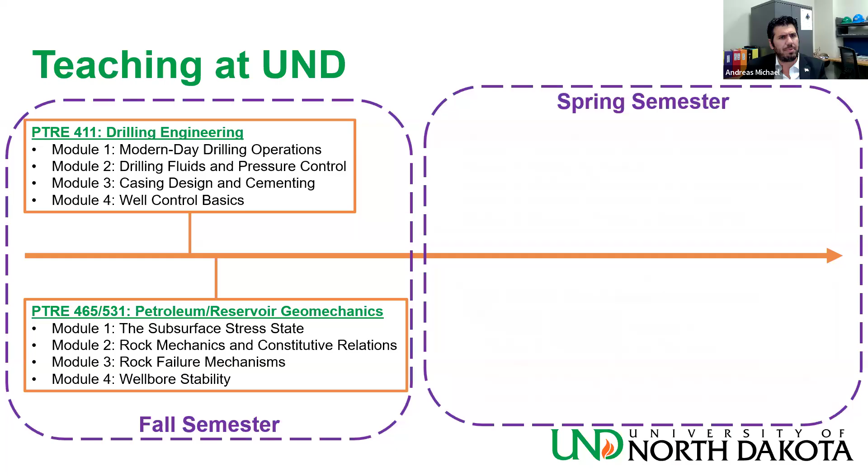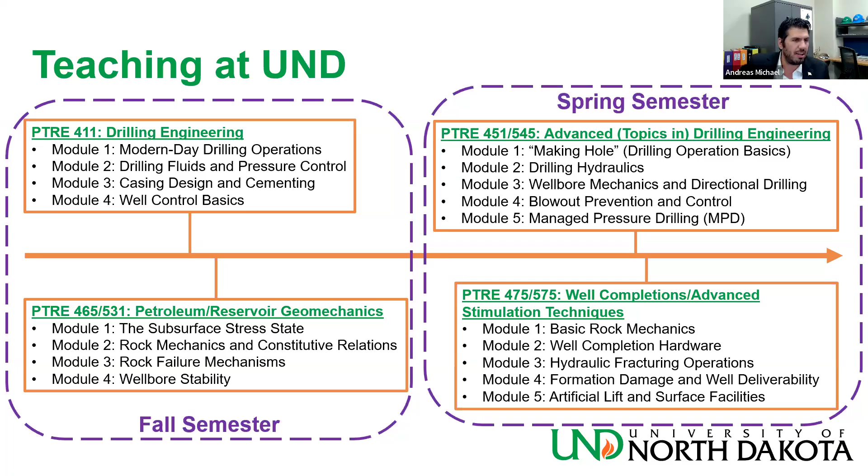Before I dive into the technical stuff, a little bit of what I do here at UND. I have been in this position since 2023. In the fall semesters, I teach two classes, drilling engineering and geomechanics. It was in one of those geomechanics lectures last fall when I came up with this idea. Richard Schultz is teaching that class this semester. In the spring, I generally teach advanced drilling engineering and well completions, which is coupled with advanced stimulation techniques, a purely graduate course. Undergraduates go through this stream of classes, taking drilling in the fall semester of their junior year, advanced drilling in the spring semester, and then geomechanics in the fall semester of their senior year, finishing with well completions. So each class is a prerequisite of the next one.

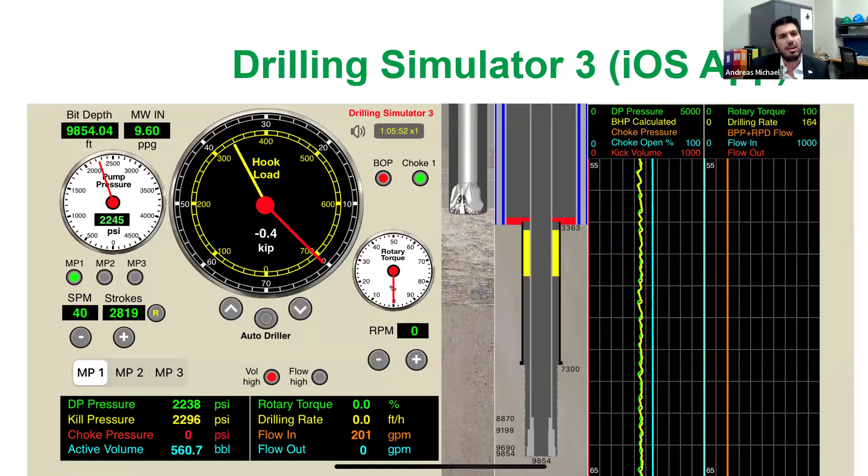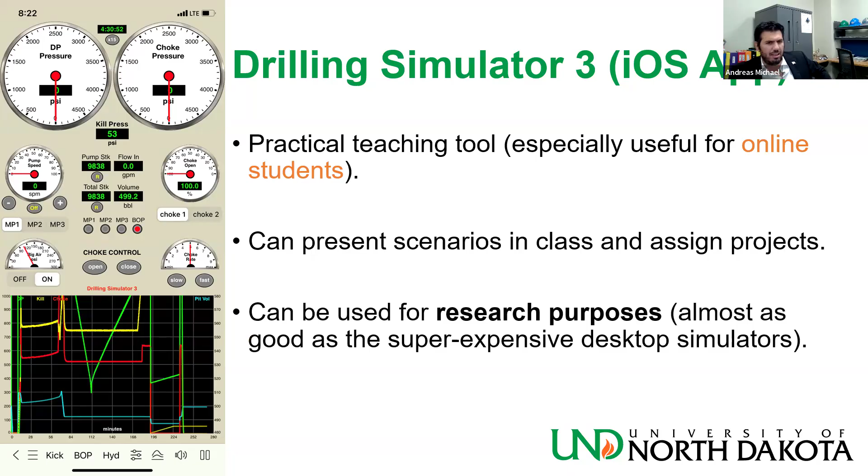Now, as you know, I'm teaching a lot of drilling courses, and UND has a very big portion of its student population that is online students. So I make a very big use of Drilling Simulator 3, which is an iPhone app actually. It's a very practical teaching tool, especially for online students. We use it to run class exercises and assign projects, and we can also use it for research purposes, although I have not yet engaged in that. It represents a proper utilization of digital transformation. You can find a lot of the exercises that I cover in class on YouTube with step-by-step guides.

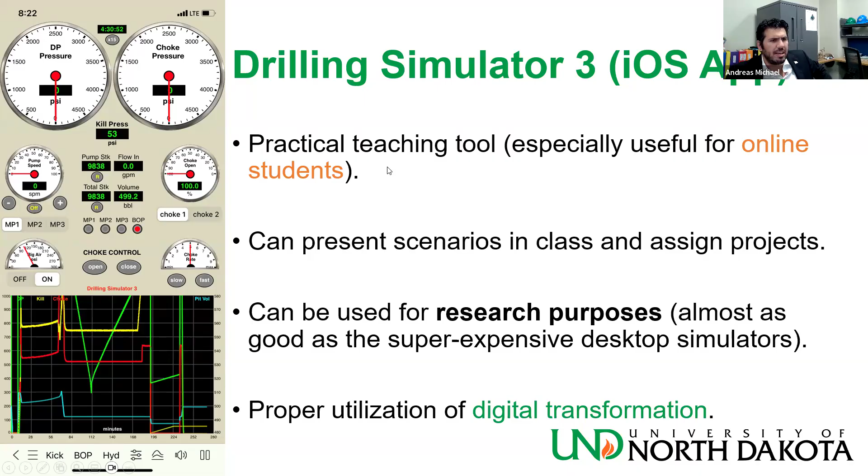I have a project on underground blowout prevention after offshore well capping. I have a project on experimental investigation on hydraulic fracture interference using laboratory scale testing on transparent gelatin blocks. I have a project on mechanistic modeling on wellbore integrity. We have a project on formation damage mitigation in enhanced oil recovery operations in carbonate formations. And we have a thermohydroporomechanical modeling project for hydraulic fracture initiation.

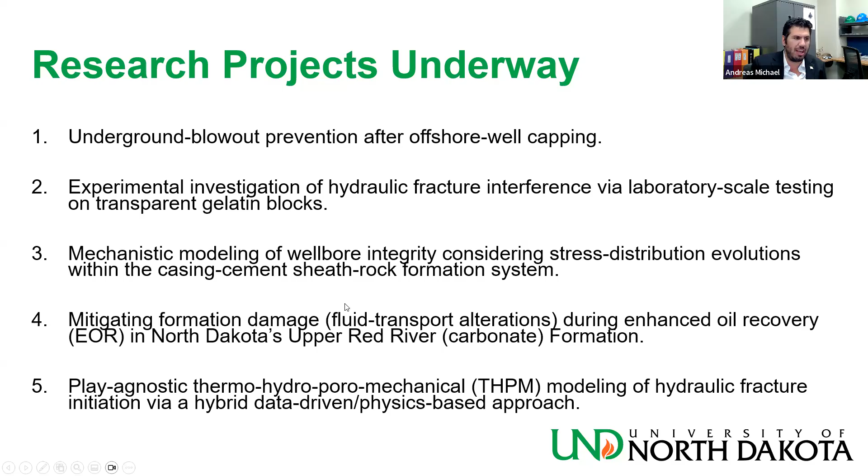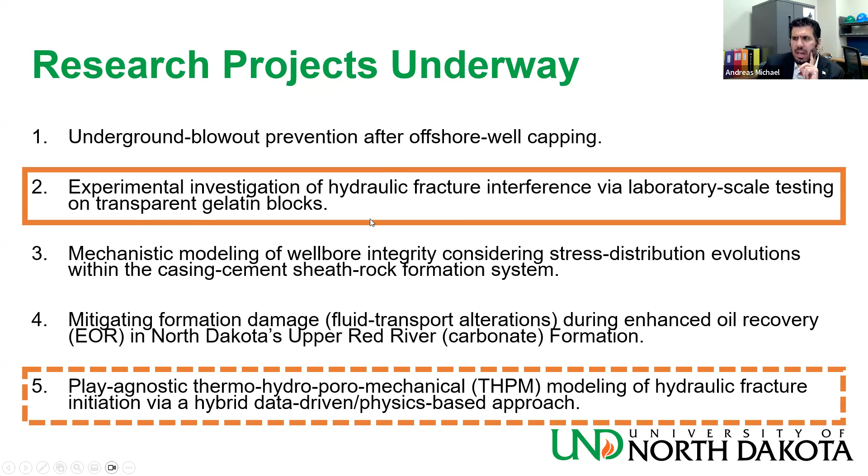What I will talk about today involves project number 2 and a little bit from project number 5. Project number 2 is the one run by the student who is a dual master's and PhD student, and it has been presented as a paper at the last ARMA symposium in Santa Fe. I did present it, and I was the first author on the paper. The second author was Chukwuemeka Kalu, and the third author was Abdelmalek Abbes. The goal is for this to be Chukwuemeka Kalu's master's project, so it's going to become eventually his master's thesis. He's going to take the lead on this project, and we plan on submitting a paper for peer review soon, somewhere in the Elsevier journals.

Now, a little bit of a historical overview in hydraulic fracturing. I always try to bring history into topics I'm discussing.

If we go back to the mid-1800s, people were torpedoing wells for stimulation purposes, and oil was discovered in the US in 1859. A few years later, this gentleman is actually the guy who assassinated Abraham Lincoln, John Wilkes Booth. He was an actor, but his job before that was to torpedo wells for stimulation purposes. He was running a company called Dramatic Oil because he liked acting, I guess. It was a common practice to torpedo wells in order to stimulate production.

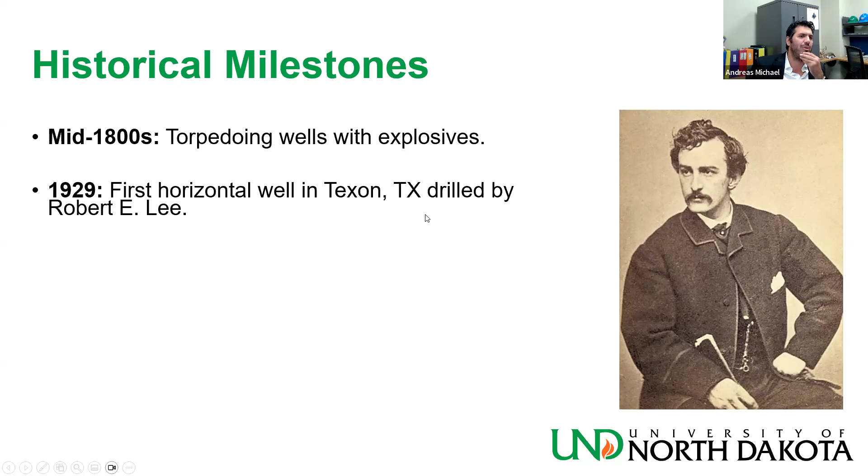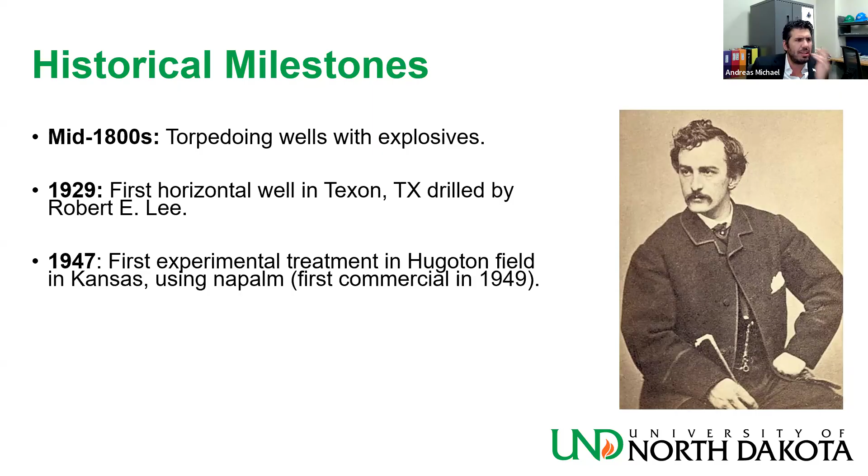And then in 1947, it's the first time fluid was used for stimulation purposes in Hugoton Field in Kansas. Napalm was used, and then two years after that, we had the first commercial treatment.

Now in 1982, George Mitchell drilled the first well in Barnett Shale in Texas. And I think it was 1997 when the first slick water fracture treatment was performed. It basically brought hydraulic fracturing technology to more or less where it stands today.

So when we do modern day hydraulic fracture treatments, our goal is we want something that looks more or less like you come in with a well, you drill a vertical section followed by a horizontal lateral. Now in real life, things will look a little bit more gentle, won't be like an abrupt kink. You have a kickoff point and then the landing point, but then you have the horizontal lateral through a shale section. And then you go from the toe of the lateral to the heel of the lateral, trying to pump as many fractures as you can.

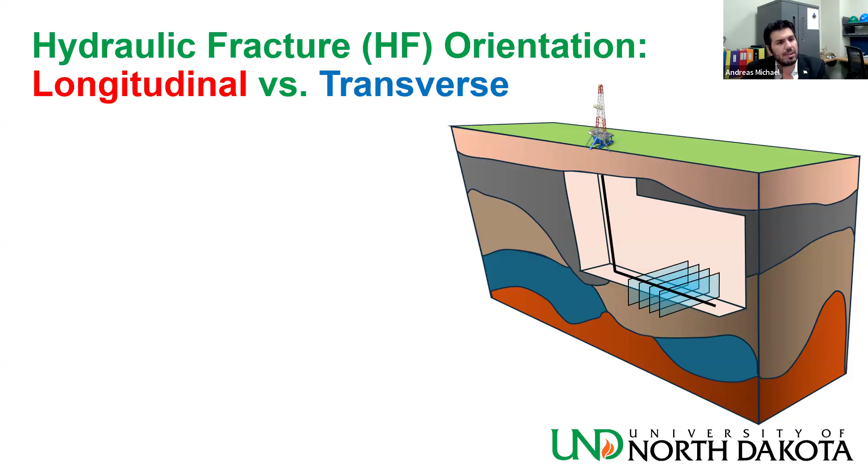And you want to stack them next to each other, and you want to get as many as you can next to each other. So the goal is what we call a transverse hydraulic fracture, which I have here colored with blue. It's a fracture that is orthogonally oriented to the wellbore. If you have a horizontal wellbore, as in this case, it would be also called a vertical fracture. But the name transverse has to do with the way it's aligned to the wellbore. Some call it lateral fractures, some call it orthogonal fractures, etc.

And sometimes you may not be able to get a transverse fracture like that. You might get something like the red fracture on the left, which is basically a longitudinal fracture. It's a fracture oriented axially with respect to the wellbore.

Now, the productivity of one longitudinal fracture is higher than that of one transverse fracture. However, if you stack many transverse fractures next to each other, they will outperform one gigantic longitudinal fracture, which would be what you will get if you get multiple longitudinal fractures growing next to each other. So one longitudinal fracture outperforms the transverse, but many transverse will outdo a gigantic longitudinal fracture. So the goal, what we are going after in modern day hydraulic fracture treatments, is the blue fracture on the right.

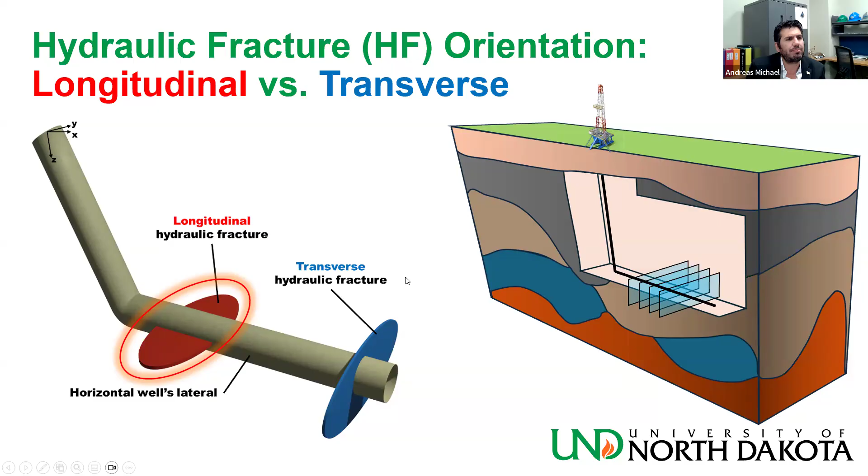Now, many times, I guess the general rule of thumb is that if you drill your horizontal lateral along the least compressive stress, you maximize your chances to get transverse fracture initiation. But this is not always the case, and that is because when you are drilling a well, you are removing rock and you are replacing it with fluid. That disturbs the stress field around it. And you also do other stuff like you run casing, you cement it in place, you have formation damage coming from different ways. So you have a lot of stress impediments in the near wellbore region that may prevent your fractures from initiating in this favorable direction.

I have here on the left a screenshot from Valko and Economides' book, Hydraulic Fracture Mechanics, from 1995. You see a well that was drilled in a favorable direction, but the initiation wasn't favorable. So you get longitudinal fracture initiation from that well. These longitudinal fractures won't go very far away from the well. They will either terminate prematurely or they will hit on a discontinuity like a pre-existing fault, and they will reorient to the favorable transverse orientation.

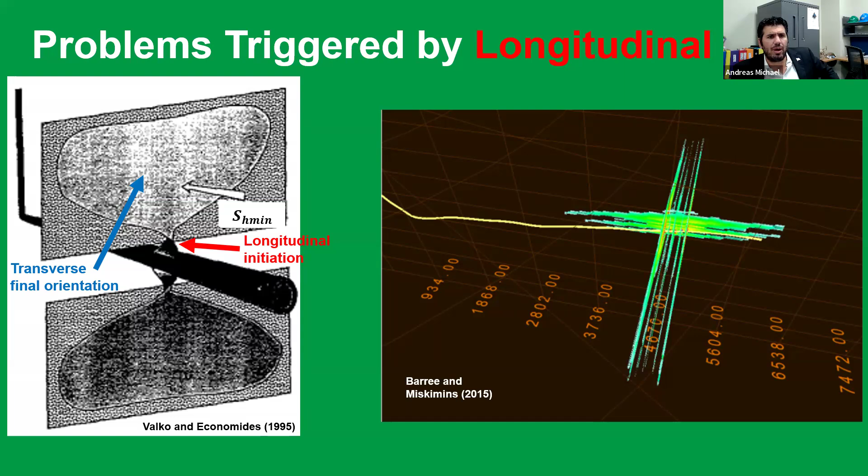Nevertheless, this twisting that takes place in the near wellbore region creates what we call near wellbore fracture tortuosity, and it affects operations quite greatly in an adverse fashion. You can get early screenouts or low stimulated well productivity, which affects your economics very badly. Now, on the picture on the right, you have a more real-world version of what happens in a larger scale, let's say, and that is from Barree and Miskimins 2015.

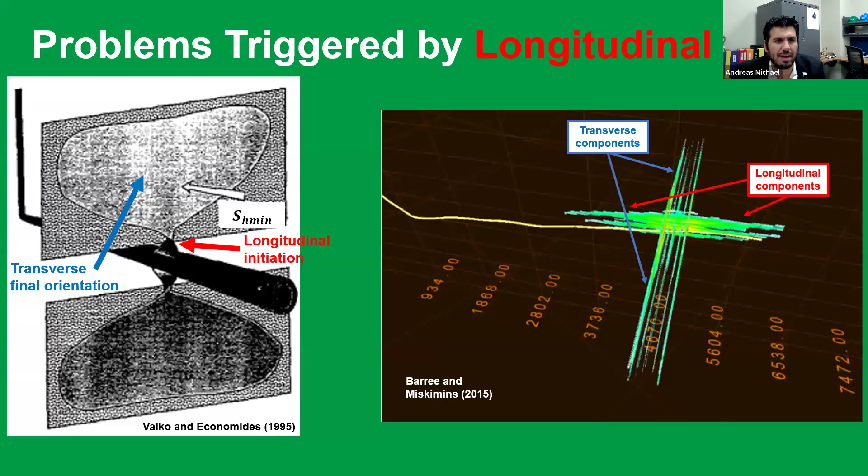You have longitudinal components mixing with transverse components, causing a lot of what we call near wellbore tortuosity, and we are trying to avoid this.

From the same paper, I have here a picture from a tracer test run during the treatment, a multi-stage treatment, where the fluid used to stimulate stage 1 is colored yellow, the fluid used to stimulate stage 2 is colored red, and the fluid used to stimulate stage 3 is colored blue. So if we do our job right, yellow fluid will stay in stage 1, red fluid will stay in stage 2, blue fluid will stay in stage 3.

But you see mixing, you see yellow fluid in stage 2 and 3, red fluid in stage 1 and 3, and blue fluid in stage 1 and 2. So you get stage communication, which was attributed mainly to those longitudinal fracture initiations in that paper. And it shows us that longitudinal fracture initiation is a reality many times, and it can adversely impact your stimulation treatment result. So we want to avoid that.

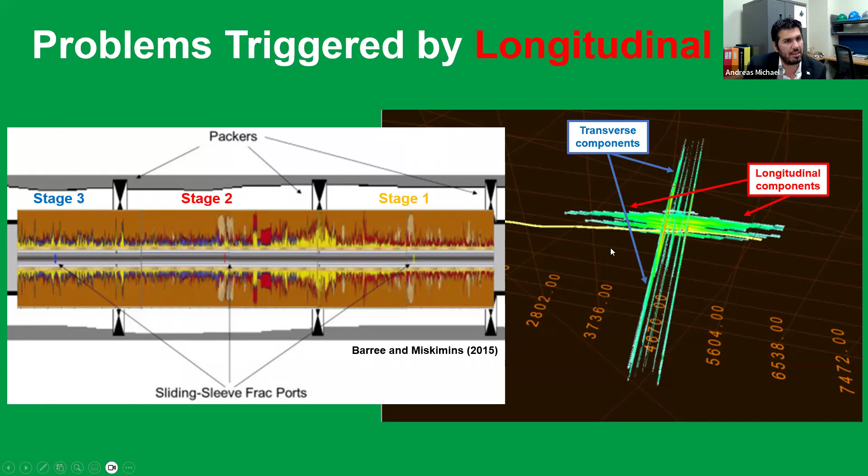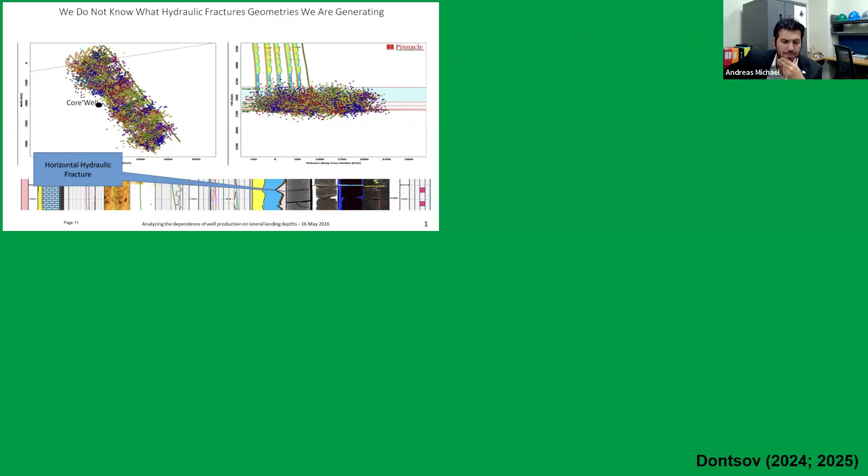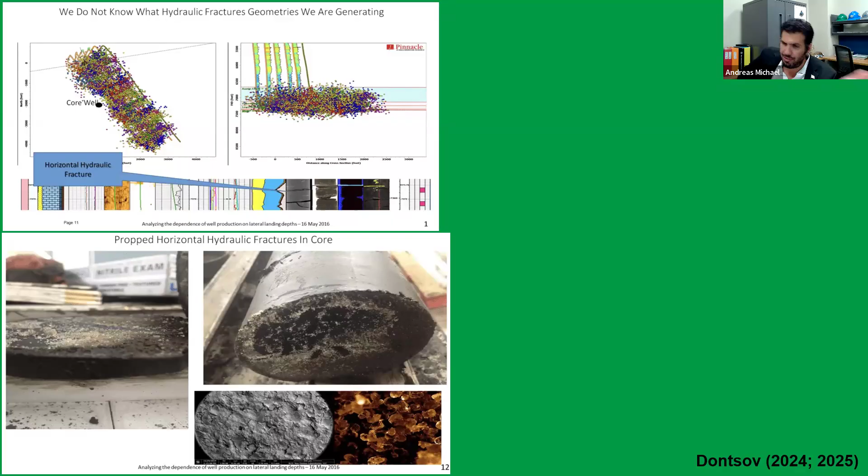Now, Egor Dontsov last year had a very, very interesting blog for ResFrac where he presented a lot of evidence in terms of microseismic data, core observation, casing deformation, tilt meter data, and even fiber optic measurements that basically provided evidence for horizontal fractures, which would be basically what we call longitudinal fractures from a horizontal well. And this year, he had another interesting blog where he discussed the computational modeling of those horizontal fractures, which is very, very important. So slowly but surely, these longitudinal fracture initiations become more and more important in our job.

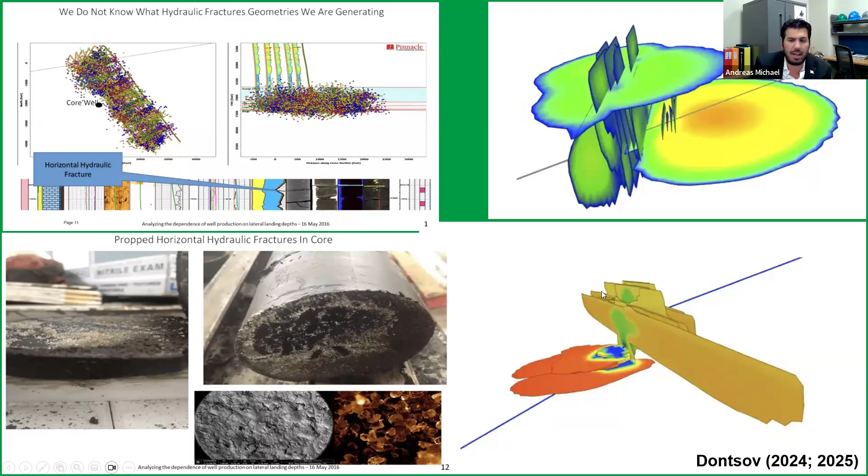And it's something, I guess, that is worth examining. And to examine fracture initiation, you have to look at the subsurface stress state, which is simplified greatly by the Andersonian faulting theory, where we have basically a vertical stress called SV and a horizontal stress SH max and SH min. SH max always bigger or equal to SH min.

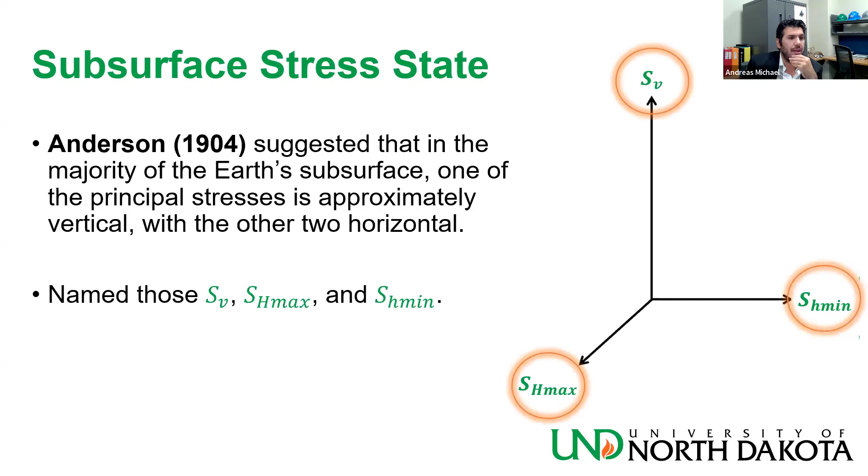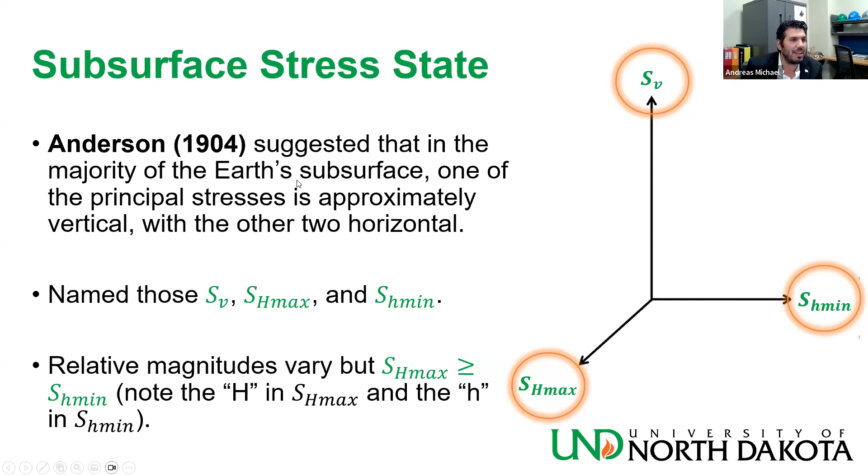Notice the uppercase H for SH max. So the two rules that we have to honor for Andersonian's theory is basically one of the stresses needs to be vertical, the other two need to be horizontal, and SH max cannot be smaller than SH min. Now, that gives an infinite number of different stress permutations for those three in situ principal stresses.

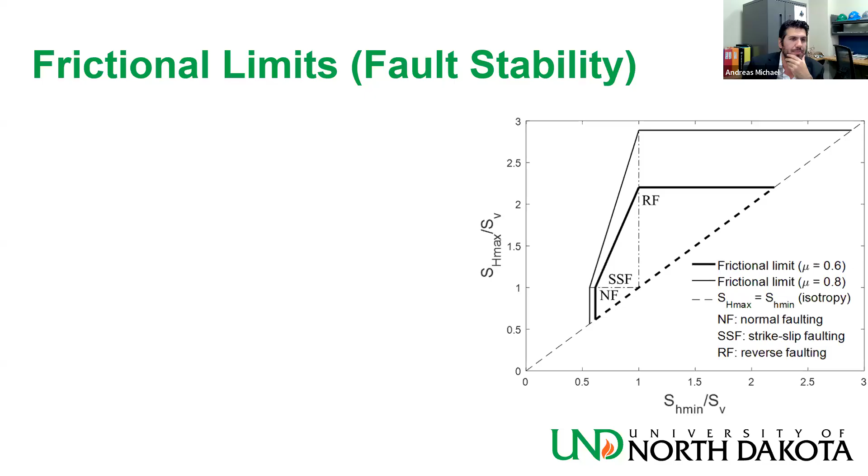We need to think which of those permutations will yield a stable environment. And for that, we need to consider fault stability. And we basically use a stress polygon to display this.

I know that it was Zoback sometime in the 70s, I think, or early 80s that came up with the concept of a stress polygon. The version I'm using in my work, in my publications, is one that was from Nelson in 2005, which is fully dimensionless. So we have SH max on the vertical axis and SH min on the horizontal axis, both normalized by SV. The dotted diagonal represents the line of horizontal isotropy where SH max is equal to SH min.

As we cannot have SH min bigger than SH max, anything below that diagonal is impossible to exist. And then with the solid lines, we have the friction limits. That is basically honoring Mohr-Coulomb's failure criterion for pre-existing faults who exhibit a friction factor of mu between 0.6 and 0.8. The solid lines are for 0.6 and the thinner solid lines are for 0.8.

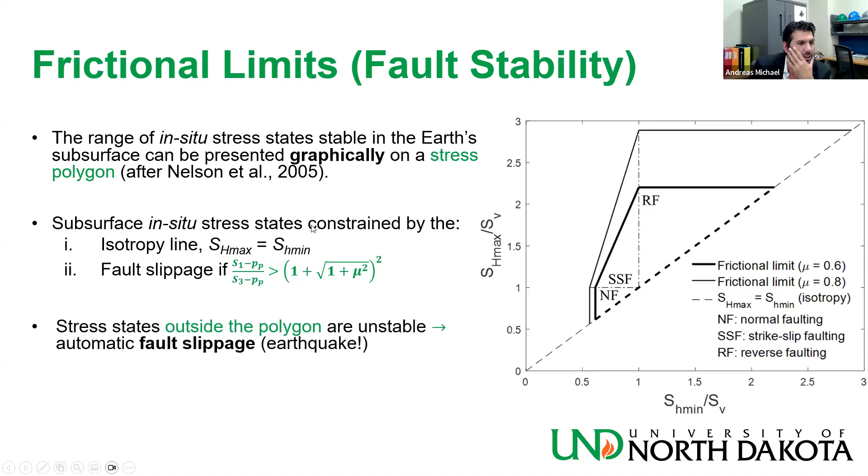Now, there is a lot of assumptions associated with this polygon. All the faults need to be critically stressed and favorably oriented. But that basically gives you a nice idea of what stress states are possible to exist in a stable fashion in the Earth's subsurface. And we have the three faulting stress regimes: normal, strike slip, and reverse. Reverse faulting has SH max bigger than SH min, which is bigger than SV.

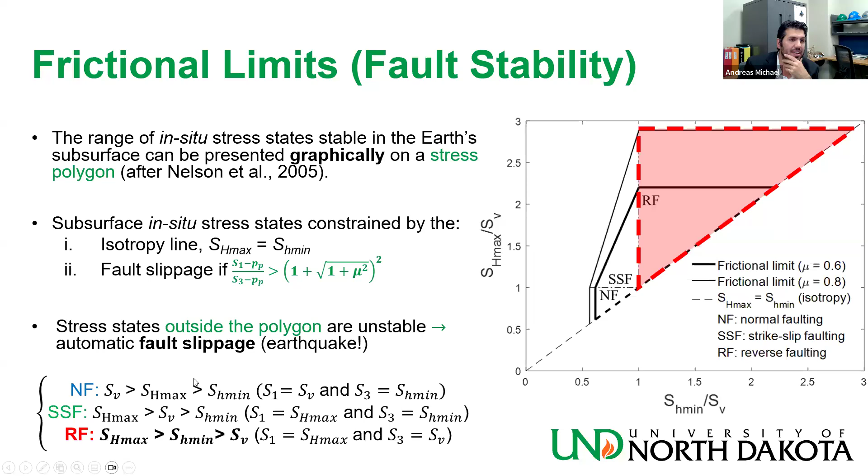And something that was counterintuitive when I was young and I was working on this stuff as a student was that even though normal faulting is the most common stress regime that you will encounter in the Earth's subsurface, the range of stable stress states that are possible to exist for reverse faulting massively outweighs those of strike slip and normal faulting. So that's an interesting finding.

Now, when it comes to tectonic confinement, the limits basically of SH max and SH min, Simpson tried to further simplify everything in 1997 by lumping the three values of the in-situ stress states into one dimensionless variable. He called that A phi, which basically varies from 0 to 3. 0 to 1 is for normal faulting, 1 to 2 is for strike slip faulting, and 2 to 3 is for reverse faulting.

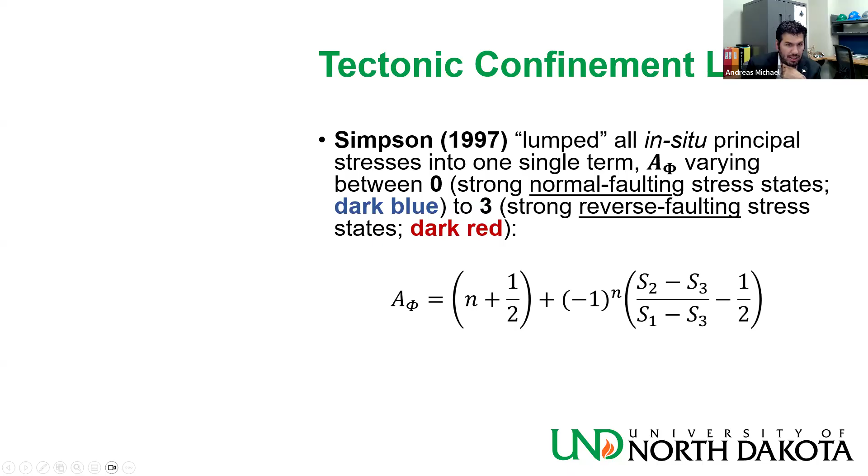Jens-Erik Lund Snee, he was in Stanford at the time.

He thought about applying a temperature color scale into those A phi ranges. Dark blue was assigned to very strong normal faulting, dark red was assigned to very strong reverse faulting, and everything else designated with intermediate coloring.

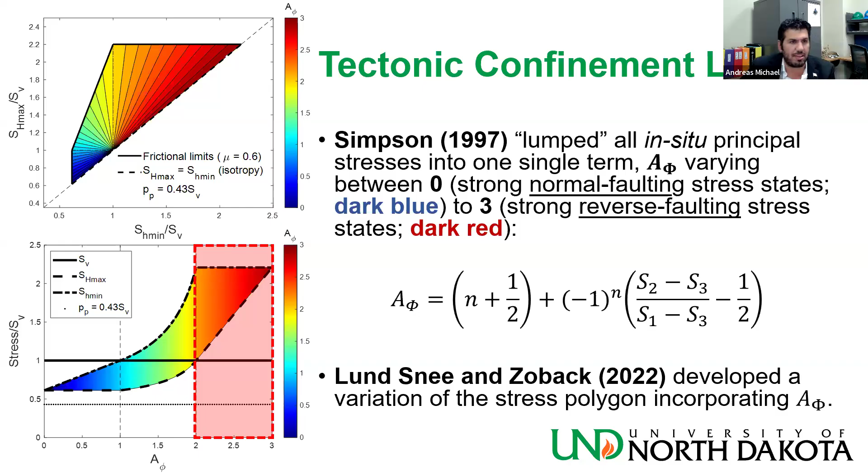In my geomechanics class, I make the students draw this diagram for one homework because I believe it has a lot of utility. If we're able to show failure on this plot in a graphic manner, it will become a very valuable tool, almost as strong as a stress polygon is today.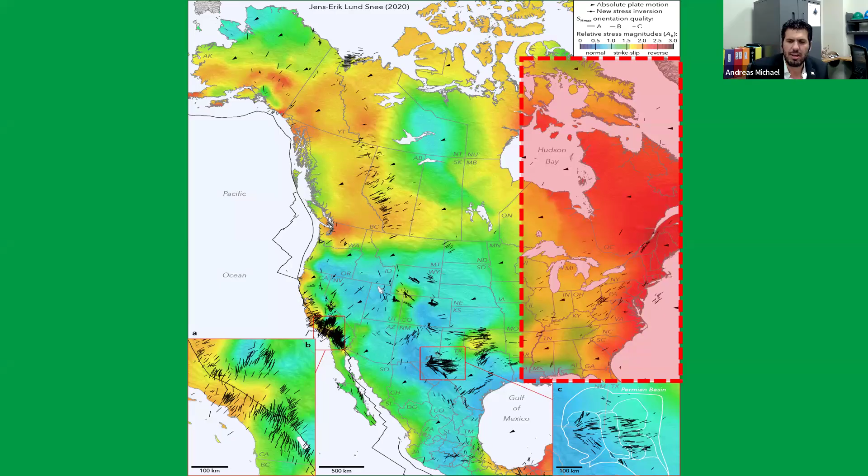Looking at the map of North America, we see a lot of reverse faulting stress environments on the East Coast, and also on the west side of Canada where the Montney Shale is, and there are parts in Mexico as well, in the south, etc.

But the application of what I'm discussing in this project extends beyond reverse faulting stress states. There are areas of Vaca Muerta that are strike-slip towards reverse faulting that have the same issue. Utica, Montney Shale has parts that are reverse faulting. The Cooper Basin in Australia, Gippsland Basin in Australia, and parts of the Sichuan Basin in China all have the same issue this project is trying to address.

So there's a lot of utility that goes beyond reverse faulting stress states.

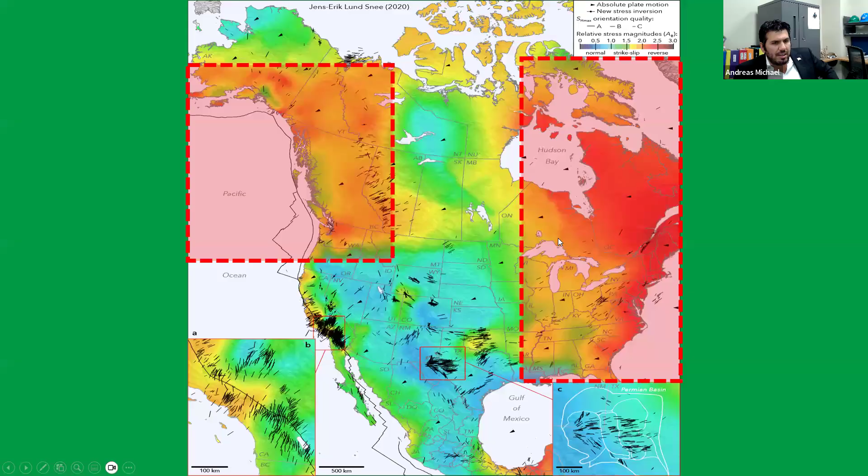If we were giving this presentation in the 1950s, it wouldn't be via Zoom, and the room would be divided between horizontals and verticals. There would be people advocating that all fractures are vertical, and others advocating that all fractures are horizontal, and they would both have strong supporting evidence on either side.

It was Hubbert and Willis in 1957 that ended the discussion by saying tensile fractures can be either horizontal or vertical. It depends on the stress state. Generally, or always, mode 1 tensile fractures often do work against the least compressive in situ stress.

For normal faulting and strike-slip faulting, this is easy. As I said earlier, you just aim your lateral to be parallel to Sh min, and then you maximize your chances for a favorable transverse fracture initiation. Sometimes this may not be the case, but it doesn't mean you have to drill your well any different. In fact, in Louisiana, it's state law to drill your well north to south — that's basically toward the Gulf, which is approximately the direction of Sh min in that area.

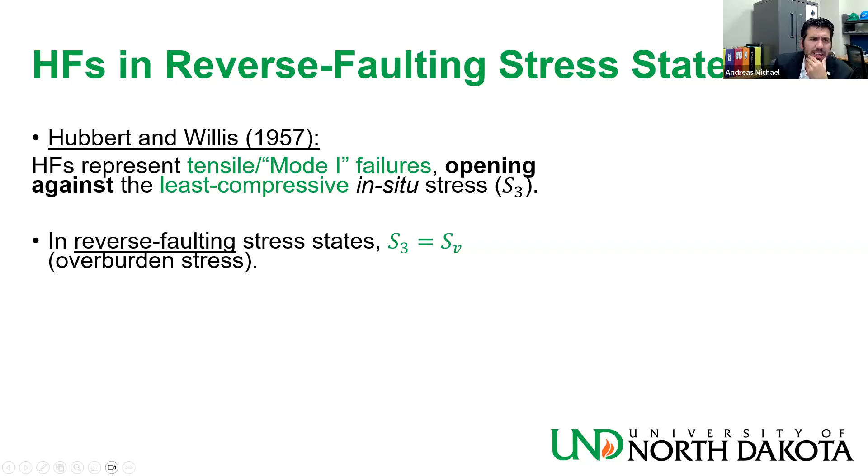But when you're dealing with a reverse faulting stress state, the least compressive stress is basically SV. That will promote longitudinal, pancake-like fractures, which we want to avoid because we don't want our stimulated well to be underproducing.

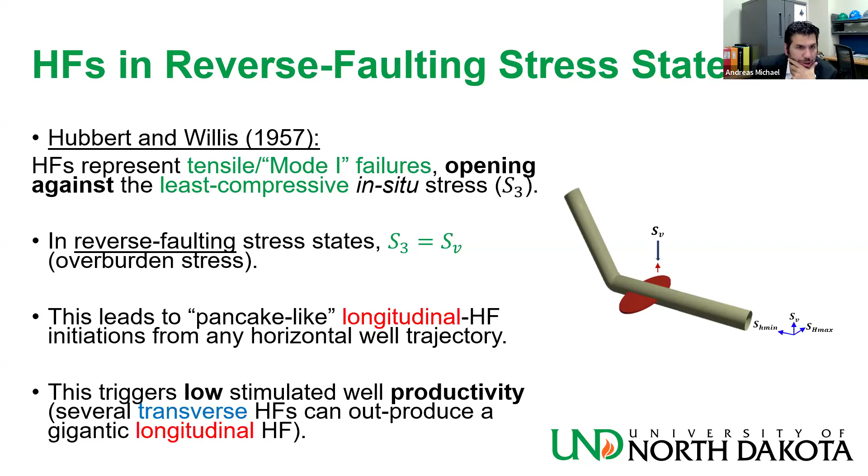So they were trying to get longitudinal fractures from those vertical wells, and they were getting transverse fractures instead, which was a problem. So what they decided to do was create a transverse fracture and use the stress shadow from that fracture to increase the vertical stress, the overburden stress, below it. When you go underneath this transverse fracture and try to initiate a fracture from underneath, it will be longitudinal. Then you hope this longitudinal fracture propagates long enough and dominates production so that your well won't be underperforming. They were very successful in that venture and published a patent about it.

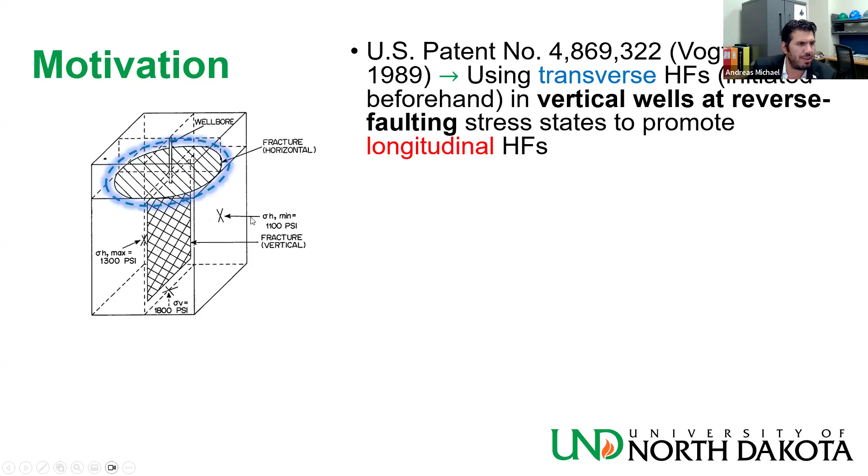One of the authors of the patent came to LSU to give us a presentation on artificial lift back in 2018, and I had a discussion with him afterwards in the Q&A. He mentioned this patent to me, but I didn't know specifics about it. It was last January where I remembered his name, reached out to him, and he sent me the patent. I saw this is the method they actually used: a transverse fracture on top, followed by a longitudinal one right at the bottom. The second patent related to it is a more modern one from 2012.

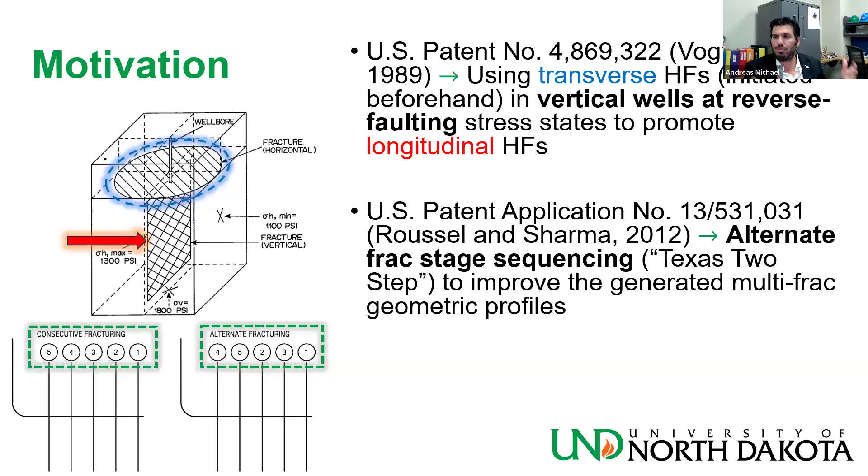It's the Texas two-step, which basically suggests that if you go for an alternate fracture sequence instead of a traditional consecutive one—instead of going straight consecutively 1, 2, 3, 4, 5, you jump one stage and then go backwards—some adverse stress shadow effects will be mitigated, so the resultant geometric profile of the produced fractures will be much more favorable.

My hypothesis was that if we utilize stress shadows from longitudinal fractures initiated beforehand in horizontal wells, in a reverse faulting stress environment, we will be able to promote transverse, more desirable hydraulic fractures. Because if you look at this first patent from '89, we're basically dealing with the same problem rotated 90 degrees. They wanted to get a vertical fracture from a vertical well, and we want to get a vertical fracture from a horizontal well, or a transverse fracture from a horizontal well. So it's basically the same problem inverted by 90 degrees.

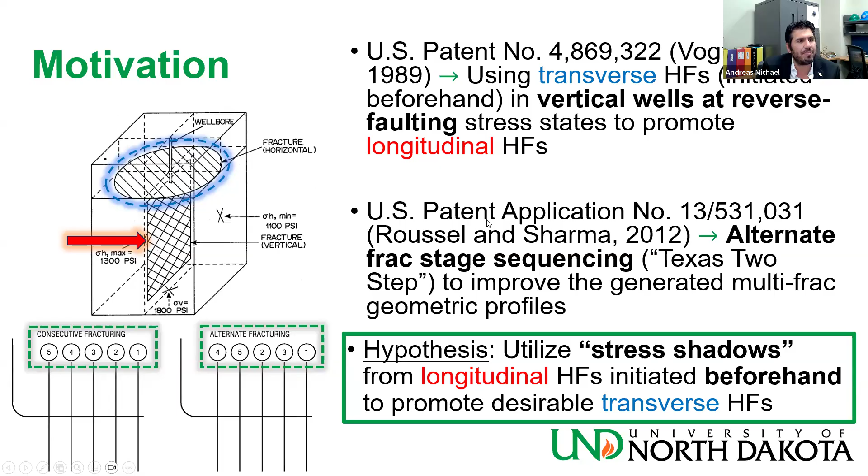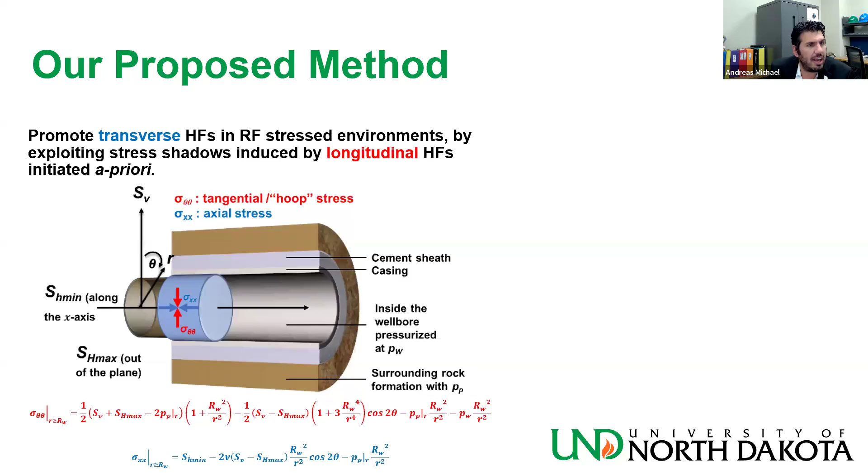To mathematically back our proposed method, we need to look at the stresses on the wellbore walls. We look at two stresses we're interested in: the red tangential stress, indicated by sigma theta theta, and the blue axial stress, indicated by sigma xx. I color the tangential stress red because that drives longitudinal fracture initiation, and the axial stress blue because that drives transverse fracture initiation. This is in the absence of considerations for perforation tunnels, etc.—you just have the rock penetrated by the horizontal lateral.

The idea is that you generate two longitudinal fractures from two stages apart from each other, and then you use stress shadowing from those fractures to increase the local overburden stress SV, such that when you go between them and try to initiate a fracture, this fracture will be transverse and will dominate production.

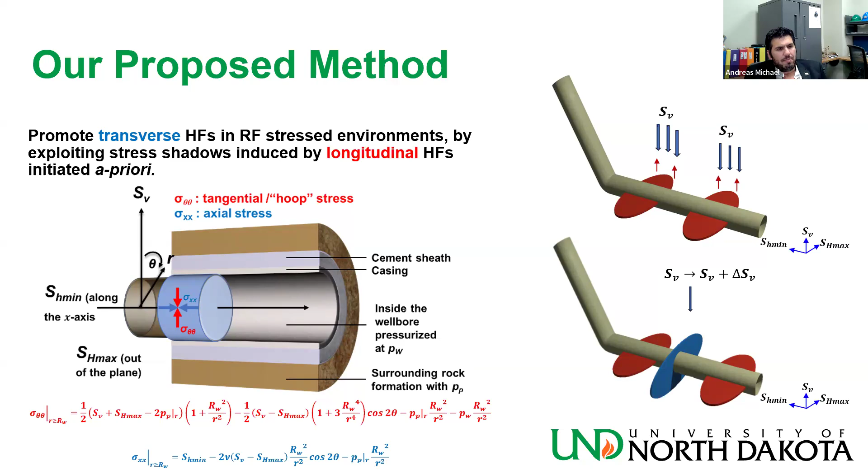Mathematically, at this level of complexity, the problem is exactly the same as that of drilling induced tensile fractures. You have two mathematical criteria that need to be satisfied so that you get transverse fracture initiation. First, you want your axial stress, the blue axial stress, to be more tensile than the tensile strength of the rock. Second, you want it to be more tensile than the tangential stress at that location, the red tangential stress. Then you can play with the math algebraically and derive closed form expressions of the criteria needed for this method to work. Beyond that, you can also attempt to derive closed form expressions for the fracture initiation pressure.

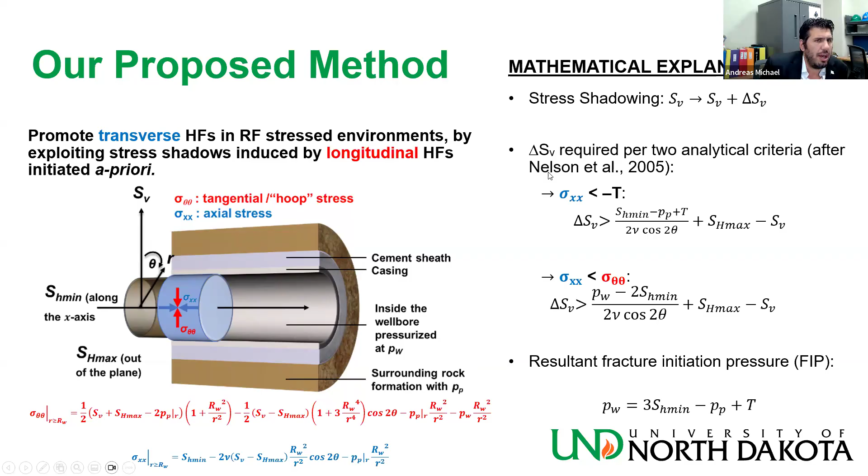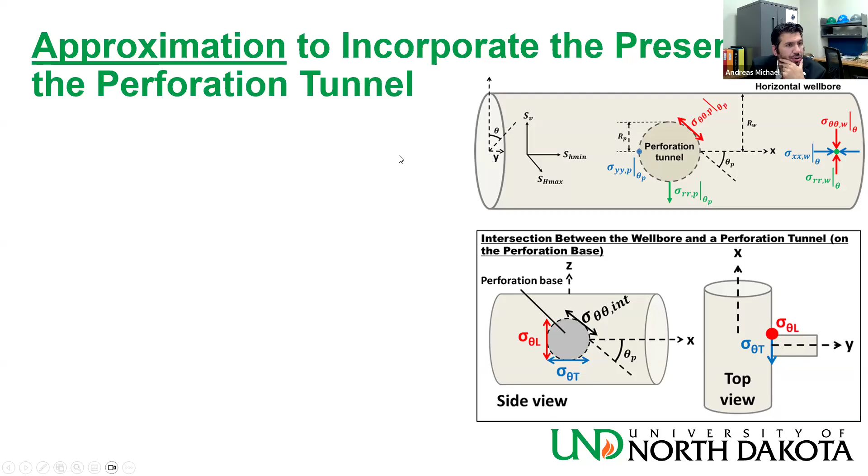We can also take our analysis one step further and incorporate the presence of the perforation tunnel, which will further increase complexity in the near-well vicinity, because the perforation tunnel will also interfere with your stress field in that location. Sadly, there is no fully analytical solution, to my knowledge, for the stresses around the base of the perforation tunnel, where we assume the fracture will initiate. It's a very famous mathematical geometric shape known as the Steinmetz curve, and I'm not aware of any mathematical solution for the stress field around that Steinmetz curve. I would be very interested in that, actually.

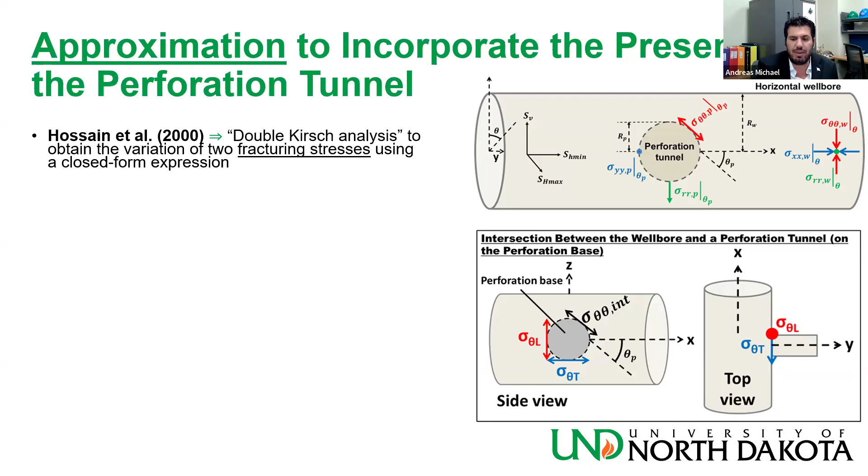But Hossain in 2000 had the idea that you can approximate the stress in that area by doing a double Kirsch analysis. You neglect the presence of the perforation and do a Kirsch analysis for the wellbore walls at that location, then use the results from the first Kirsch analysis for a second Kirsch analysis to find the tangential stress on the perforation base.

From that stress, which I call sigma theta theta int, you can calculate it at two different locations. The location given by the red arrow, denoted by sigma theta L, is the stress you need to overcome to initiate a longitudinal fracture. We call that sigma theta L. The blue arrow, indicated by sigma theta T, is the stress you need to overcome to generate transverse fracture initiation. Basically those two stresses, the red and the blue, substitute the axial stress and the tangential stress from the analysis in the previous slide for transverse fracture initiation.

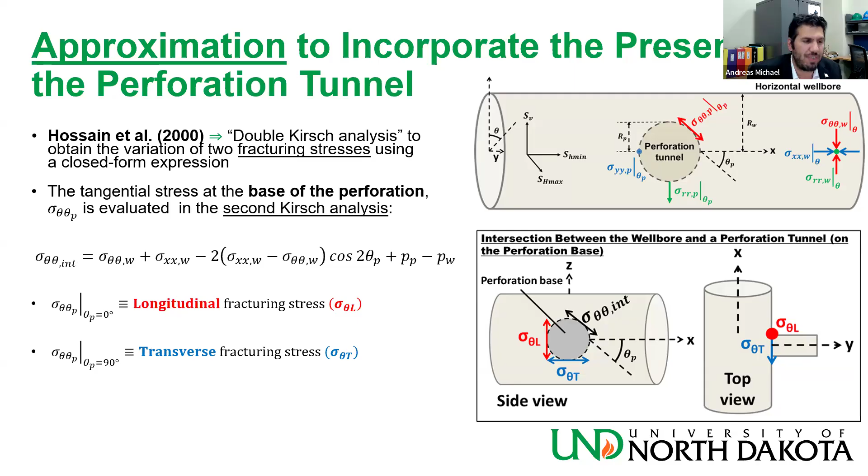You can derive closed form expressions for the approximations of those stresses. Now I have to emphasize that these are approximations, they are not analytical solutions. I have a student, his name is Nassim Bouabdallah, who is working specifically on this topic, trying to correct them and provide numerical corrections for those stresses.

But another thing that he did in a paper that he published, we presented in ARMA 2024, was that he added thermal effects and linear poroelasticity to those expressions. Hossain, when he derived those expressions, neglected pore pressure completely, as well as tensile strength. And during my PhD, I modified those expressions for pore pressure, and Nassim further modified those for linear poroelasticity and thermal effects.

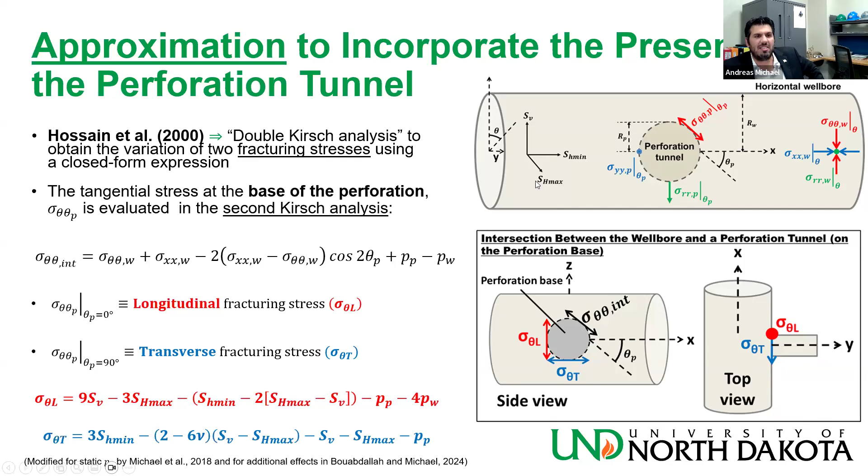Now we have the idea, but we don't know how well it can work in real life. So we had to do some validation at scale. For that, we use experimental testing with transparent gelatin blocks.

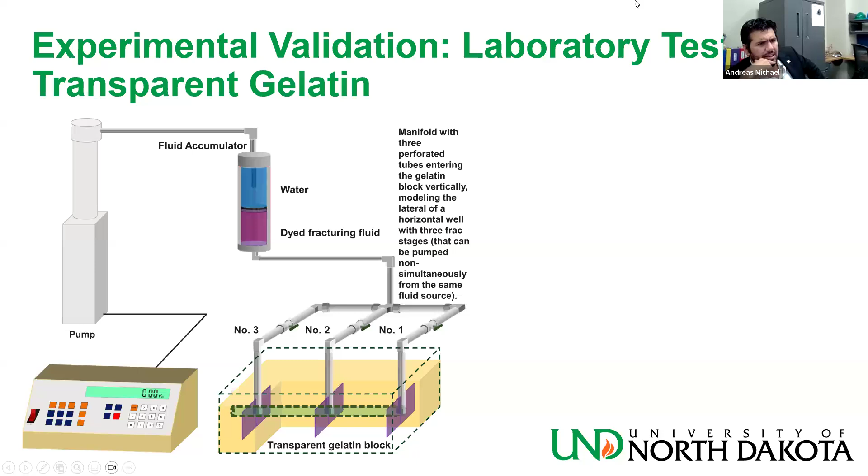You can very easily modify this to get more than one fracture per stage if you want more complexity. It's just that we are still at academic level with this project, so we are keeping it pretty simple, because there is a lot of geometric complexity you can get if you try to generate three hydraulic fractures from a horizontal well.

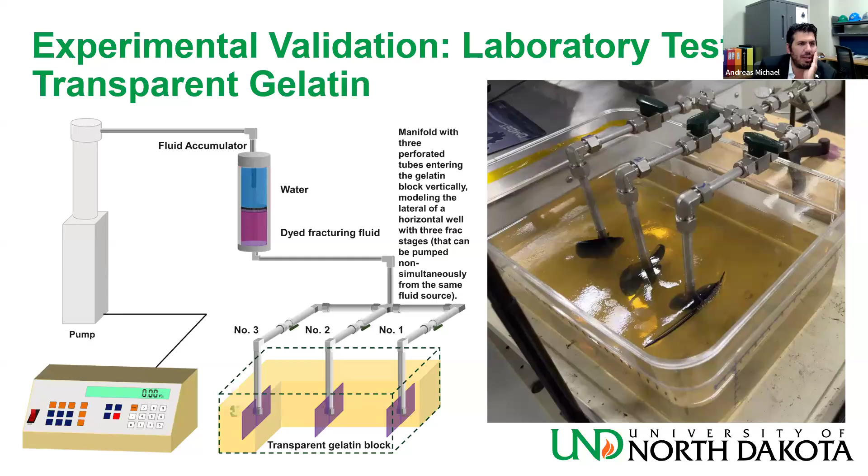Now, when it comes to gelatin tests, gelatin has been used many times for hydraulic fracture experiments. The first time it was actually used was in that Hubbert and Willis paper in 1957. He actually did an experiment generating a longitudinal fracture in gelatin and an experiment generating a transverse fracture, to prove to people that you can have fractures produced in either of those extreme orientations.

I will say since then, it has been used in about a dozen studies, maybe more. I know that volcanologists like to use gelatin for their experiments, because geologic dikes are basically tensile fractures, which is essentially the same thing as a hydraulic fracture.

Now, you can use gelatin over a wide range of conditions, but it doesn't mean that it's going to scale properly with actual reservoir settings. I have two papers - one that was presented at the ARMA symposium in 2022, and then a journal paper that was published last year in IJRMMS.

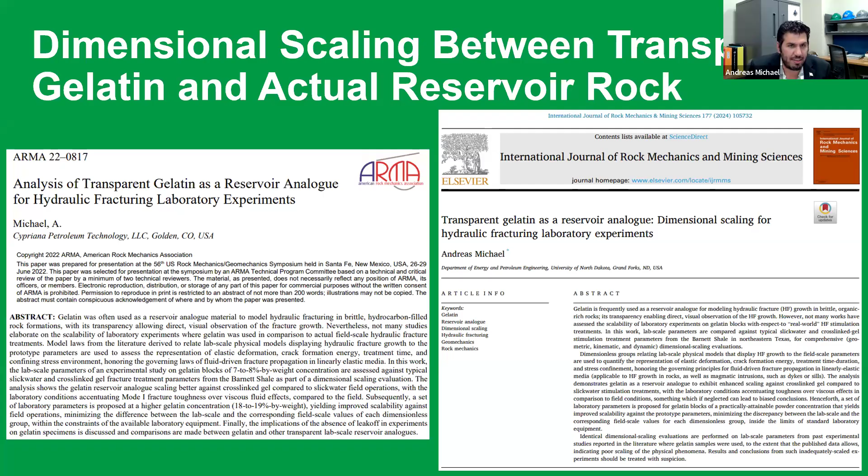One of the main conclusions of that work was that gelatin can scale sufficiently with rock under specific conditions. So we have to manipulate viscosity, we have to manipulate the concentration of powder that we use in the sample. It doesn't mean that any gelatin experiment would be properly scaled.

So once we got the scaling out of the way, we use a base case where we have 3 longitudinal fractures initiating in the experiment. We use consecutive sequencing - 3, 2, 1. So we get one longitudinal fracture, then the second one, and then the third one. This here is the digital representation of the result that I tried to draw in MATLAB.

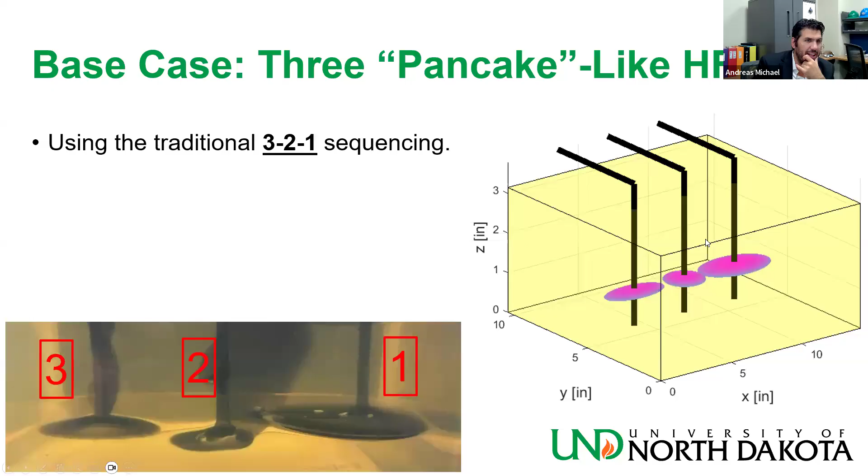We see basically the problem that we have in a reverse faulting stress state: the 3 pancake-like longitudinal fractures, if let to grow further, will merge with each other and make a gigantic pancake-like fracture that won't yield favorable productivity.

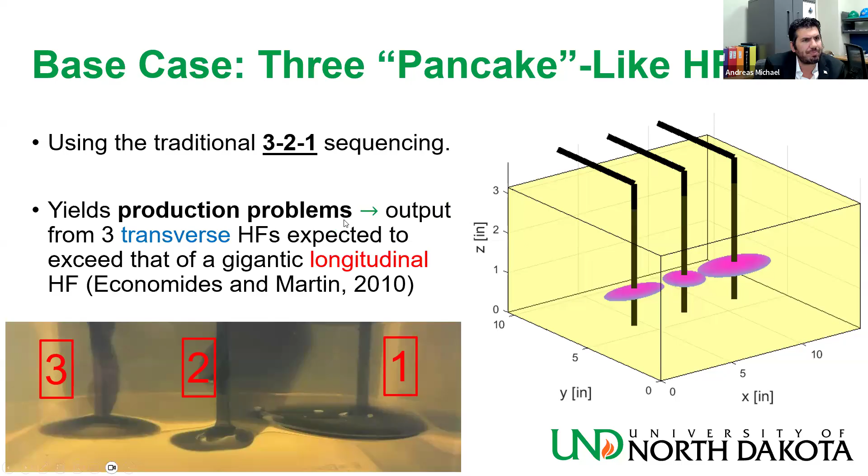Then we tried our method, which is using 3-1-2 sequencing. You have a longitudinal fracture from the third stage, then you jump to the first stage and get another longitudinal one, and then you go in the middle and produce a transverse fracture. You hope that this transverse fracture will be able to dominate production so that you get a favorable result, better than the base case, in terms of productivity.

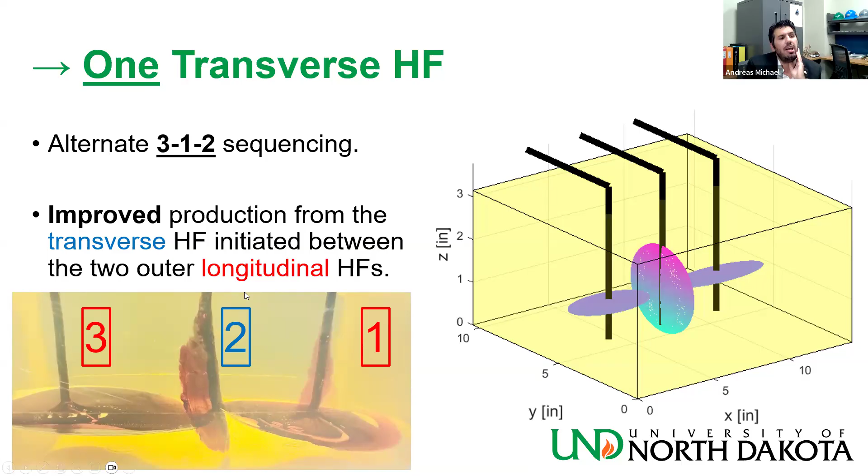After that, we said, why don't we try to get a little more aggressive with it? How about we modify our method so that we can attempt to get 2 transverse fractures out of the 3 stages, and only use 1 longitudinal.

Kalu, the student who was running those experiments, used a 2-3-1 sequencing. He got a longitudinal fracture in the middle first, then went to the third stage and got a transverse fracture there, then went to the first stage and got a transverse fracture from there. Now we have 2 transverse fractures that will dominate production, giving even better production gains than what we had on the previous slide.

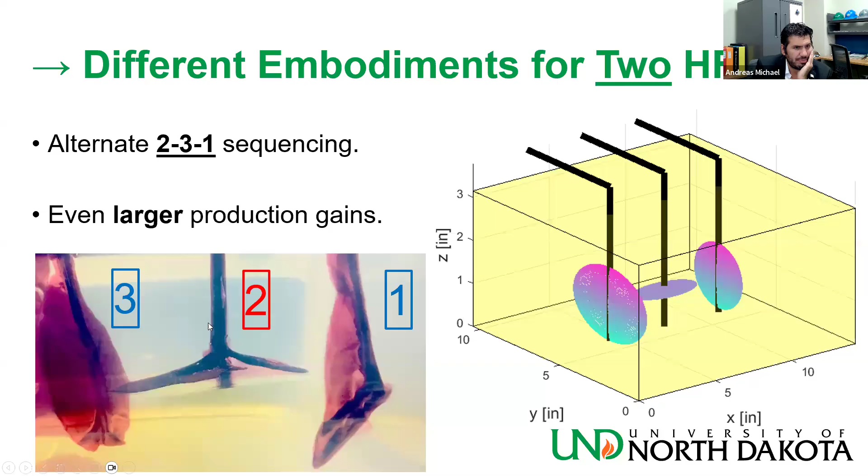An alternative variation of that, which works but is harder to make work, is a 3-1-2 sequencing. You get the longitudinal fracture first, and make sure it's long enough, then you go to stage 1 and get a transverse fracture there, and then get the transverse fracture from the middle one as well. Also bearing in mind it would be harder to get a transverse fracture from the first stage than the second stage, so it might be smarter to go 3-1-2 than 3-2-1.

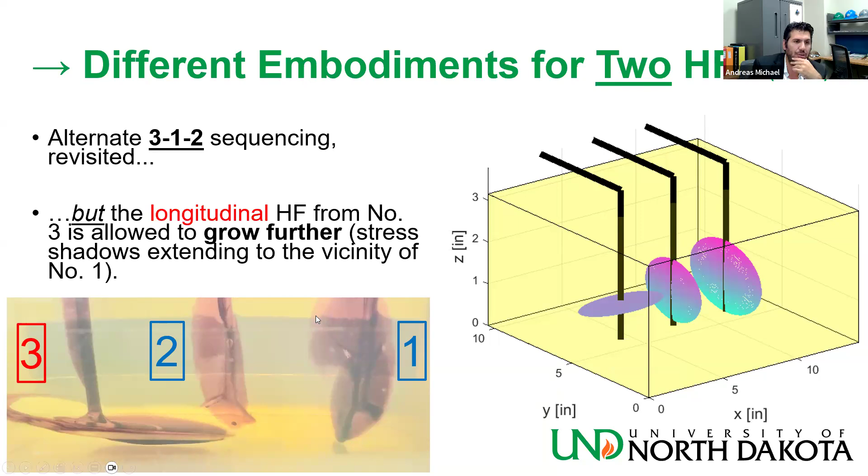Of course, you won't be able to get all those embodiments in every different setting. There might be settings where it's marginal, so you can get it easily, but you may have more extreme reverse faulting settings where it's going to be very hard to get a transverse hydraulic fracture, so you may need to do more for that to happen.

Going forward, this project is quite in its infancy. There is further laboratory scale testing we can do to optimize the proposed method. We can incorporate natural fractures and see how that interference looks, and try with more hydraulic fractures per stage to see how the intrastage dynamics look.

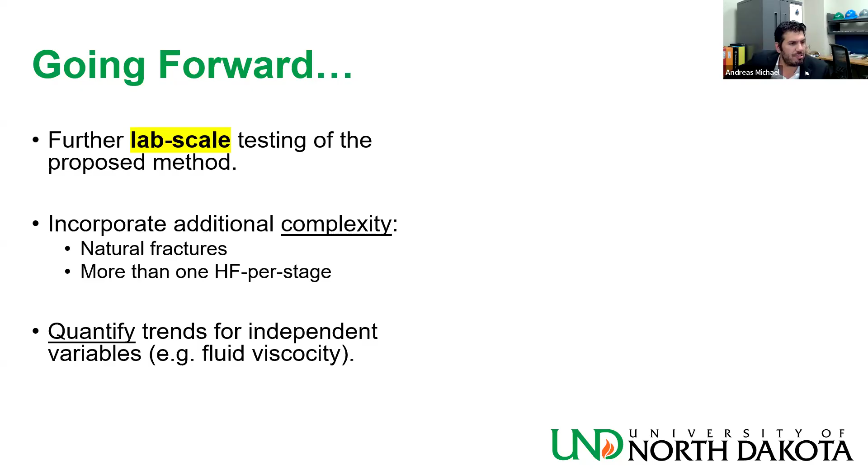We can try to quantify trends empirically and how independent variables influence the result, like fluid viscosity, which plays a very big role. Also, relaxation times with stress is something we didn't look at in that ARMA paper but will be very important in this topic. We can also look at extreme scenarios where the proposed method will not work.

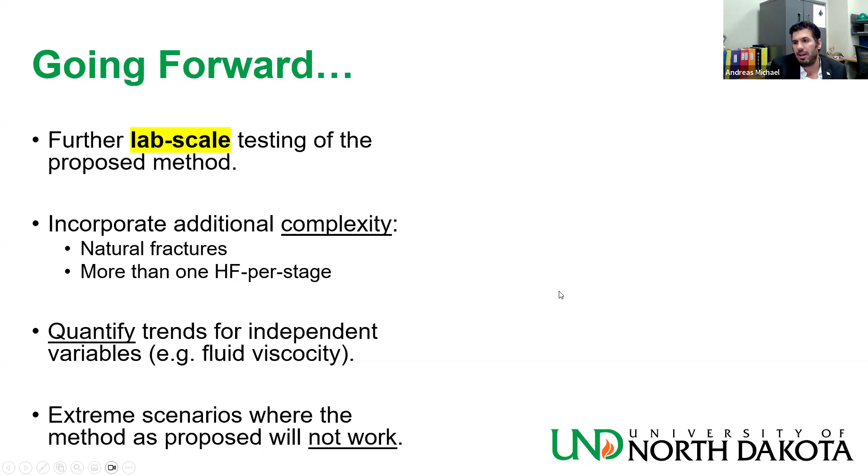One other option is to try something like they do in Canada for steam-assisted gravity drainage, having a well on top of the actual production well to get a gigantic longitudinal fracture on top, and then go underneath with another well to get those transverse fractures underneath. That would be a much more costly method, but could bear fruit if the stress environment is highly unfavorable.

We can do numerical field scale modeling using computational tools. We can have a theoretical focus analysis where we look at the stress state in the area where we think fracture will initiate. And we can have a more application-focused aspect where we look at proppant placement, etc.

We can also optimize for specific scenarios. I know from discussions with YPF people that there are areas of Vaca Muerta with this problem, and they are looking into ways to suppress this issue or deal with it.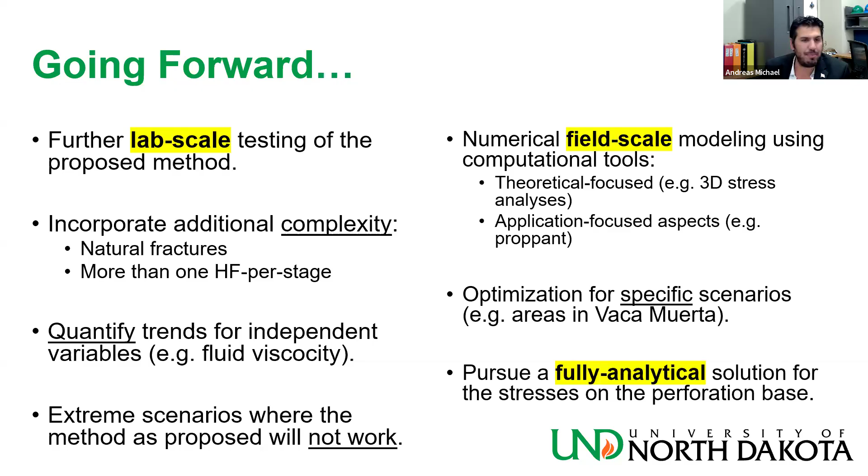And of course, the million dollar question would be if we are able to derive a fully analytical solution for the stresses on the perforation base. That would provide us with an analytical model on how to make this work, and would prevent us from having to do those approximations that could deviate from the true solution by quite a bit.

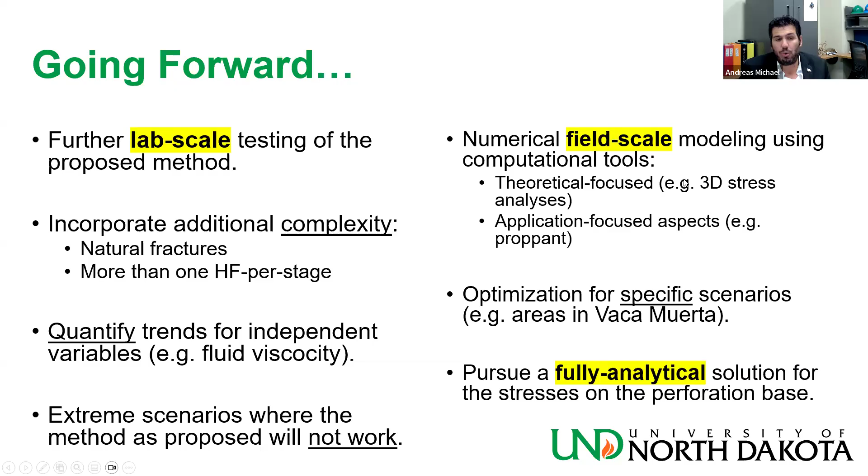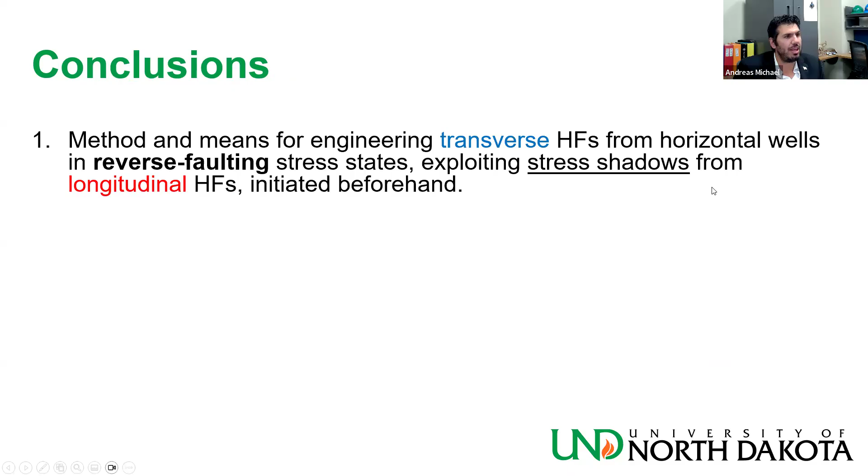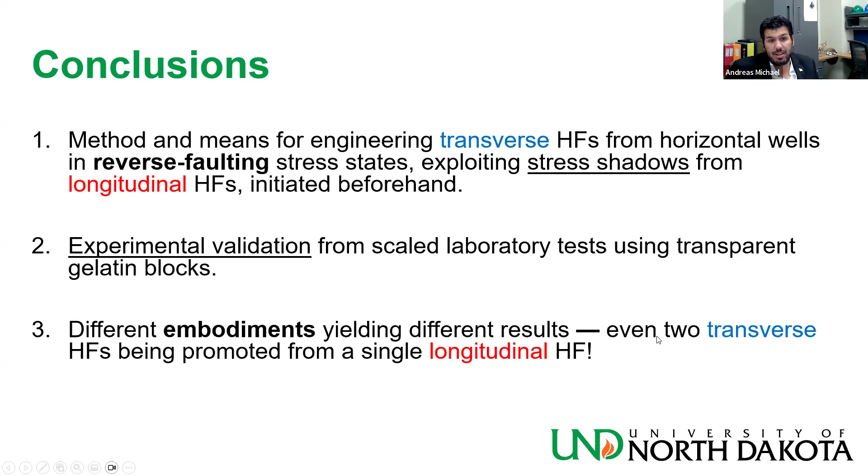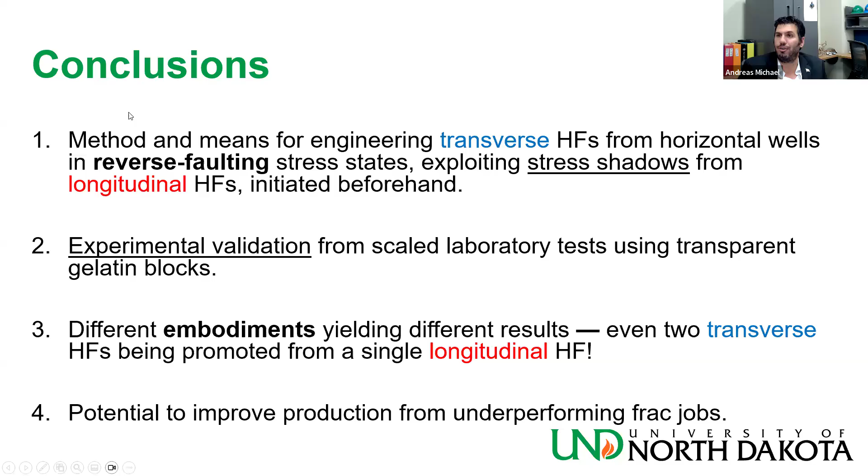In conclusion, we looked at a method and means for engineering transverse hydraulic fractures from horizontal wells in reverse faulting stress states, exploiting stress shadowing from longitudinal fractures initiated beforehand. We provided experimental validation from scale laboratory testing using transparent gelatin blocks, and demonstrated different embodiments that can yield different results—even getting two transverse hydraulic fractures promoted from a single longitudinal hydraulic fracture. This provides the potential to improve production from underperforming frac jobs.

With that, I would like to acknowledge the North Dakota Industrial Commission, which funded this project at the very beginning, the two students who have been working on this project and doing the hard work in the lab, and of course Igor and John for providing me with this opportunity to present this work. Thank you very much. I would be happy to answer any questions.

Thanks, Andreas. Very insightful. We do have some questions. The first is from Ali Danashi, and he'd like you to comment on the fact that rocks are usually brittle, while gelatin is not.

Can you take it from there?

Gelatin actually is quite brittle. It exhibits a tensile strength, at least in the concentrations that we are doing. There's a paper by Kavanagh in 2013 in Tectonophysics, where she did an extensive scaling, kinematic, dynamic scaling of gelatin. She's a volcanologist in Liverpool, England. She was using gelatin to model dikes that are tensile failures. She provided correlations for the fracture toughness of gelatin at different concentrations. If you use a very low concentration, you won't have much brittleness, but if you use higher concentration, you start developing a setup where it's pretty good, pretty brittle.

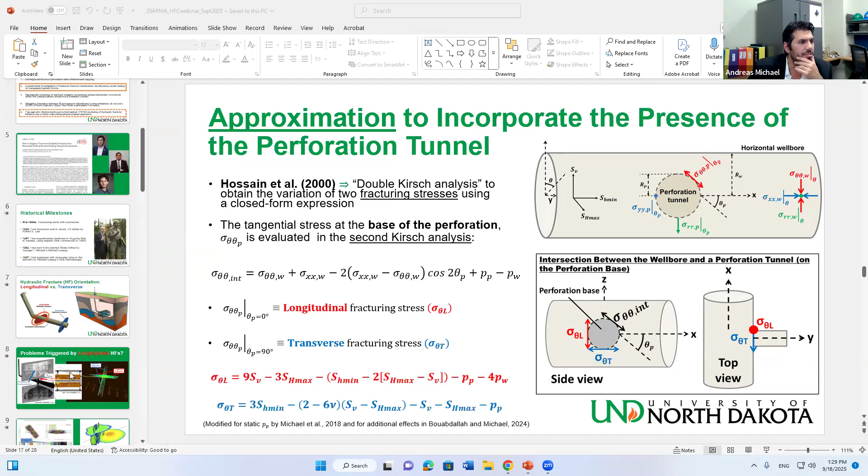And so we've only got time for one more question, so I'm going to have to - we'll give Mike Smith the last word. And I lost Mike's question, so Mike, are you still there? Do you want to ask the question?

Okay, turn on my audio there. There you go. I was just interested in how do you run the experiment. So you're injecting into fracture one and creating this horizontal fracture, and then you quit injection. Do you then seal off that fracture so you maintain the pressurized fracture, maintain a width in the fracture while you do your subsequent injections?

Yeah, that's a very, very important question, actually. The way the manifold is designed, and we are in the process of further developing it, we are able to hold some back pressure, and of course that can influence the results. We see how we can scale that with real life experiments, because you want to be able to hold pressure, or somehow you need to probe the fractures. So, yeah, we are able - basically the manifold is injecting from the same fluid source, but through 3 different avenues, so you are able to basically close one route if you want, and then use the other 2, or you can even inject from 2 stages at the same time if you want. So we have this flexibility with the manifold.

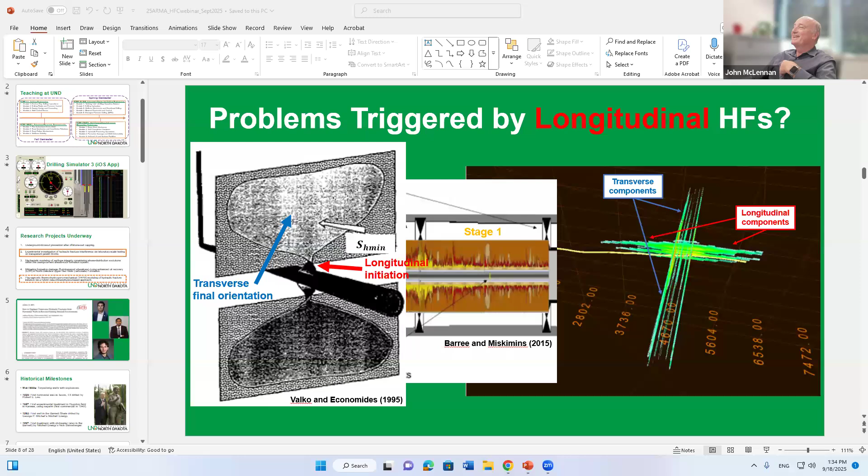Thank you, everyone. Yeah, Andreas, that was excellent. Thank you. Will I be able to see the questions that they were asked? If we're lucky. Yeah, it depends on whether I managed to...